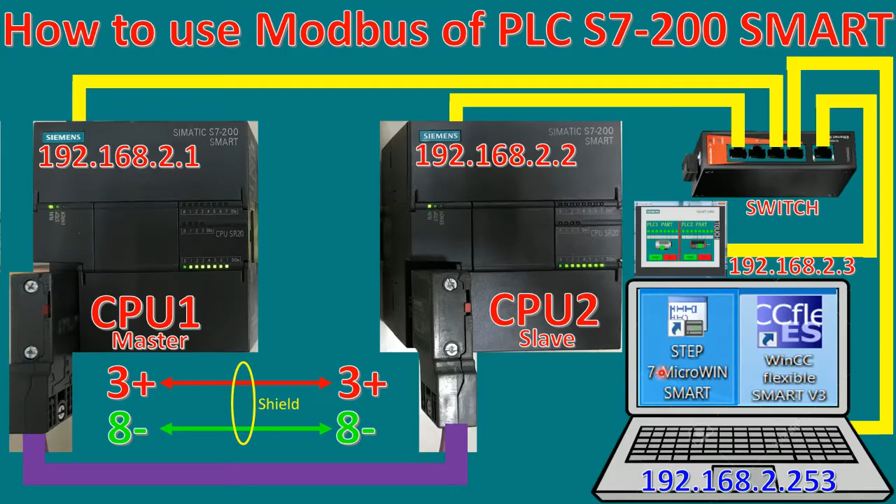Today I would like to show and share how to use the PLC S7-200 Smart CPU SR20 to send data to another PLC S7-200 Smart CPU SR20 by using Modbus RTU for communication.

Okay, so before going to create the program blocks or use the library, I would like to explain the concept a little bit. Here is the PLC S7-200 Smart that we will set with the IP address 192.168.2.1. This IP is just an example.

So if we use STEP 7-Micro/WIN SMART to connect to the PLC, we can change the IP address to match the computer IP address. So if we choose the computer IP address range like this, we can manually set the IP address of the PLC following your computer.

Okay, and here is the Modbus cable. Actually this is a Profibus cable, so we can connect from port 0 of PLC 1, for example CPU 1, to CPU 2, where pin number 3 connects with pin number 3 and pin number 8 connects with pin number 8. Pin number 3 is plus data, pin number 8 is minus.

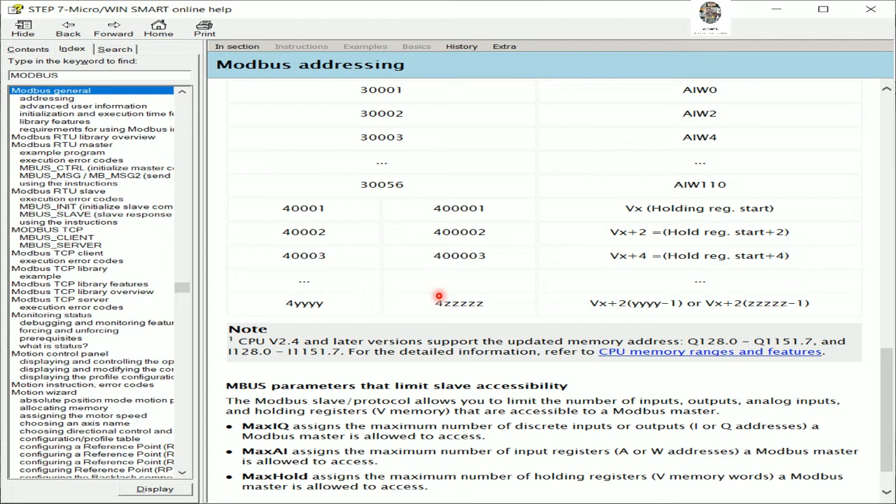For part 1, I will send data from CPU 1 to CPU 2 via IB0 to QB0. After that, I will send data from CPU 2 to CPU 1 with IB0 to QB0. So in total, 8 bits are sent from CPU 1 to CPU 2 and 8 bits from CPU 2 to CPU 1. Okay, and here are the parameters that we will learn together.

So first we can go to the Modbus library. If we install the STEP 7-Micro/WIN SMART software, we will get this Modbus library. Okay, so I would like to explain the blocks. The first one is the enable block. We can use always on SM0.0, and this is the mode. It means that if we turn it on, we enable Modbus mode. Let's see here. On means enable Modbus mode. Off means use the PPI protocol. Okay.

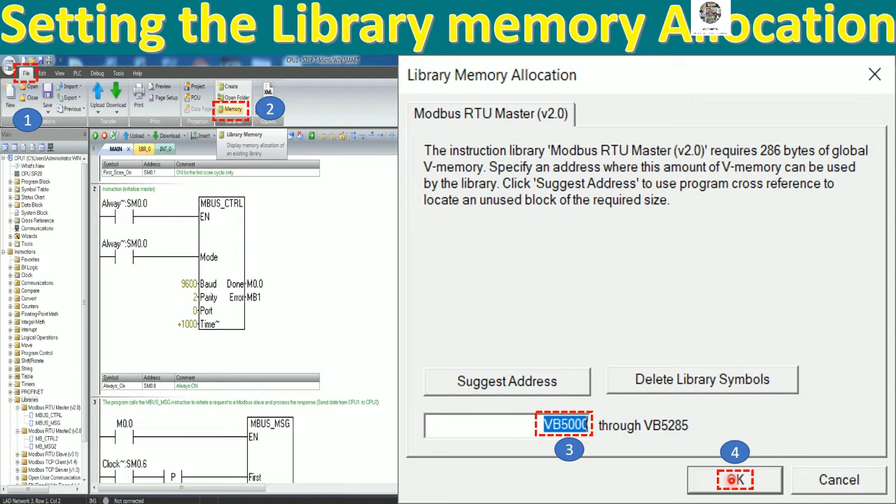And this is the step to assign the memory. First, let's go to File. Second, click Memory. Third, fill here with VB5000 and then click OK. After that, we will download the program to CPU1. Finished for the CPU master.

The next step, we will go to the CPU slave, CPU2. First we drag and drop the Modbus library block here, and we fill the address. Follow this one, and we insert the Modbus slave. Then we assign the memory allocation also with VB5000, and then download the program to PLC2. So this is step 1, we will follow this slide. So let's go.

First let's open STEP 7 MicroWIN SMART. Right now I use version 2.5, already installed on my PC. If we install it on our PC, we get the libraries, many libraries for Modbus: Modbus RTU master, RTU slave, TCP/IP, TCP server. We can use many functions for this library. Version 2.5 has many libraries we can use. So let's go to our concept.

Let's go to the slide, I already converted it to PDF. The first one I already explained: we will send IB0 to QB0 of PLC2, right? So let's go to this step. First, we need to insert the Modbus control. Go to the library tab, then Modbus master, and drag and drop the block to the main program. Okay, like this.

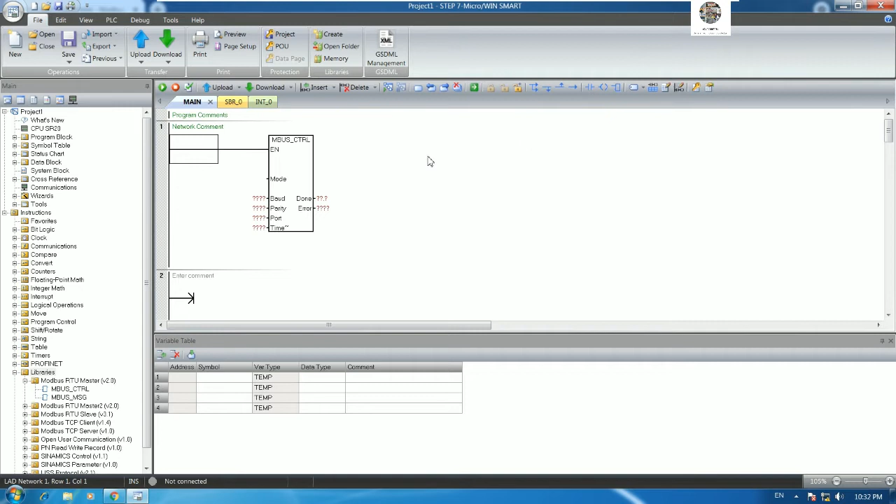The first one here should be enabled. I will zoom. We can enable with SM0.0, which means always on. For mode we use always on also, because we need to enable the RTU mode. So SM0.0 to enable the mode. Then the baud rate: we use 9600, and parity we use 2, which means even. So I will put 2.

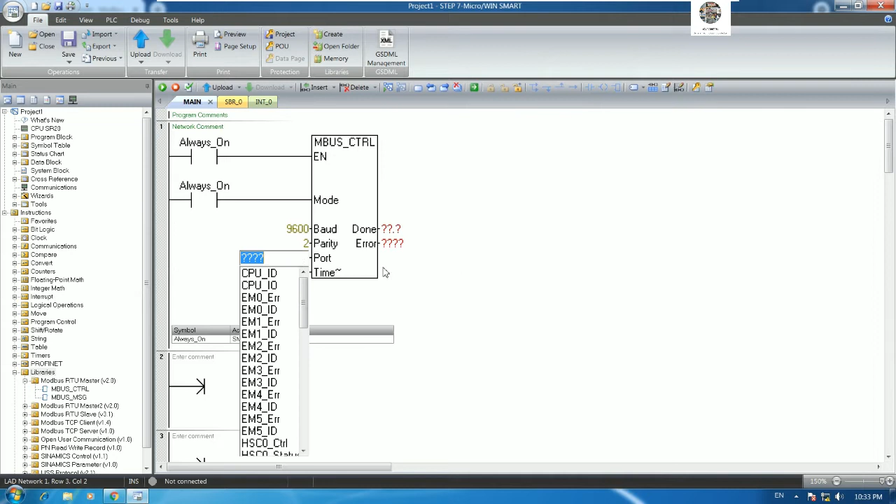And for the port, we can follow here. Port I will use 0, which means the RS485 integrated in the CPU. And the timeout, I will use 1000, which means 1 second, 1000 milliseconds. For done and error, we can use other memory, for example M0.0 and MB1, like this.

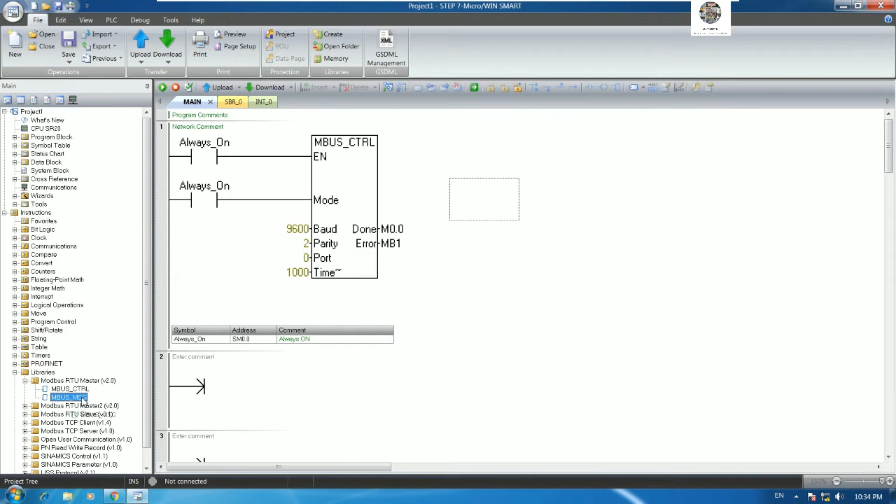And we need to insert the Modbus message. So let's go to Modbus message. The first one here, we enable also. If the control block is done, we can enable the Modbus message block. So I will use an NO contact and copy from the done. If this block is done, it means initialization is finished, and then we go to block number 2 for Modbus message.

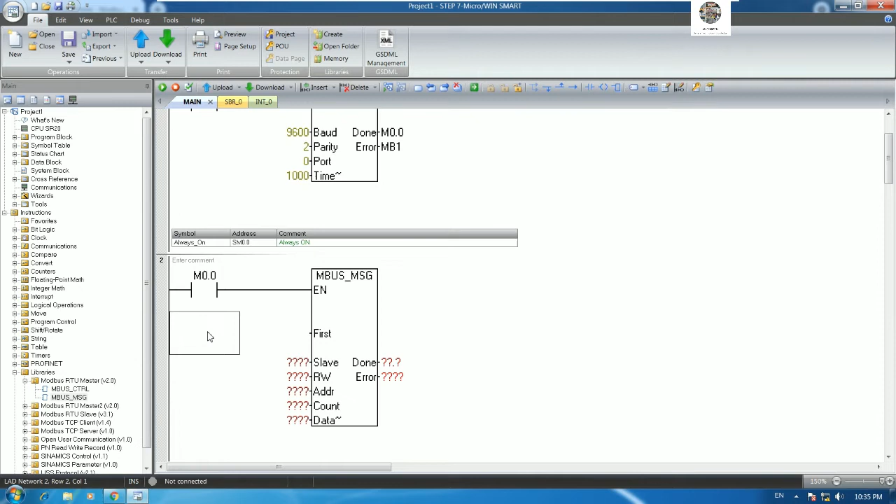And first, for initial, we can use the clock memory. For example, SM0.6, the clock pulse. We can press F1 and then look at SM memory, special memory, right?

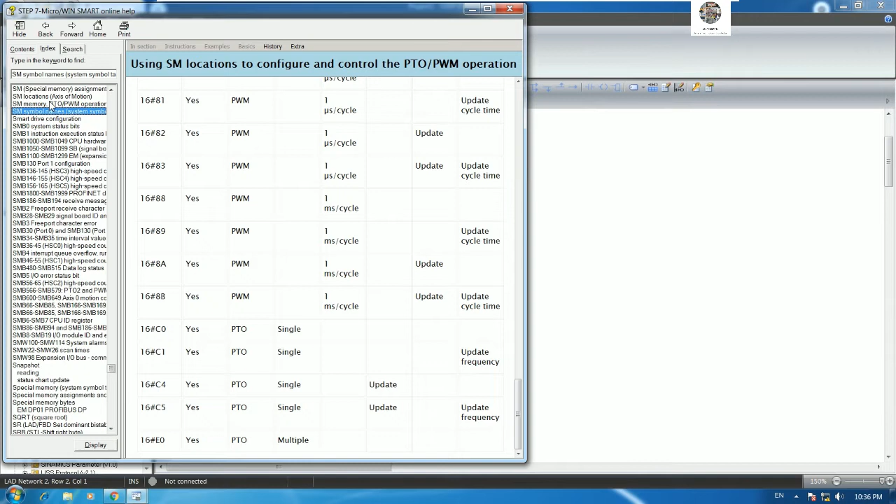So for SM memory, we can read many SM memory that we can use. Let me find SM0.6, right? SM0.6 means clock scan. So we can use clock scan to scan the block, yes.

So I will use SM0.6 and then P because we need only first, right? So for this one we can use positive edge, yes.

And for the slave, it means slave address. So example 8, and here is the read write. If we put 0, it means that we cannot write. So right now we put 1 because we write the memory to the CPU slave, right? And here is the address. I can use 1.

For count, it means assign the number of data elements, right? So we can count each bit. Example, if we would like to send two bytes, 16 bits, right? So we can enter with 16 bit. So right now I will use only 8, right? So I put 8, 1 byte, right?

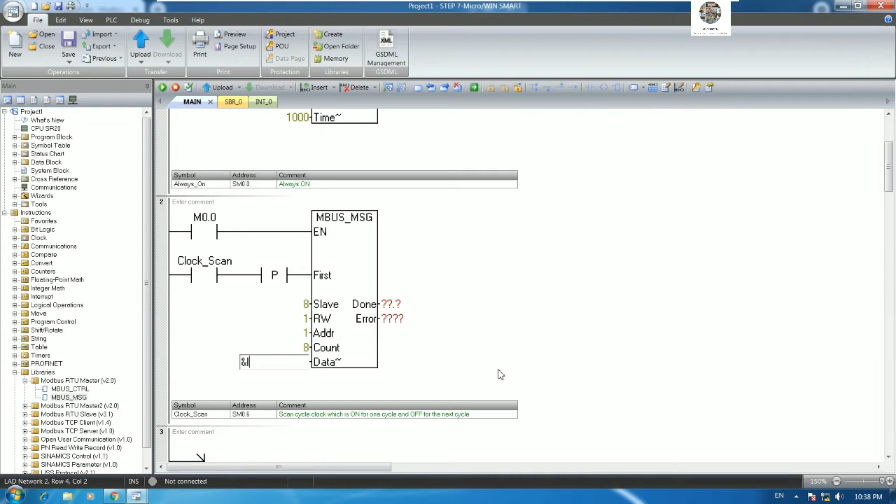And here is the data. So data will start from IB0, yes. And for that I will use M0.1, MB2, yes. Sorry, MB2, yes.

So this is the data that we will send to the slave, right? So we will insert one more for send, or get the data from CPU slave, right? So we will insert one more block for Modbus message.

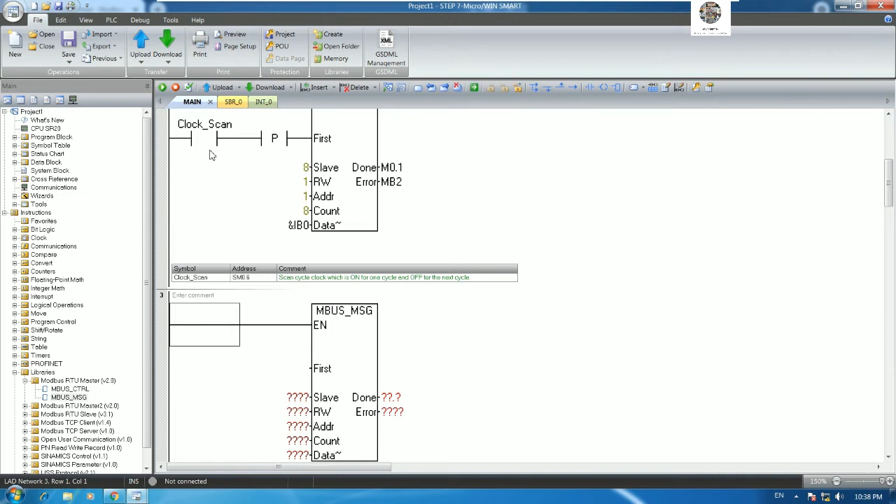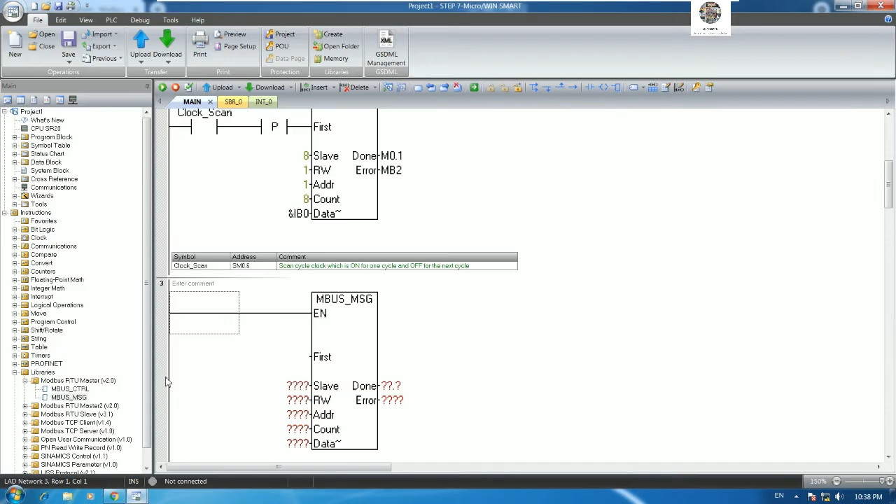Here we can enable, yes, we can enable, follow my slide. So this one I will use as M0.0 also, yes. So M0.0 means that block number 1 is finished here. And then block number 2 will turn on, right? So I will use N, it means negative edge.

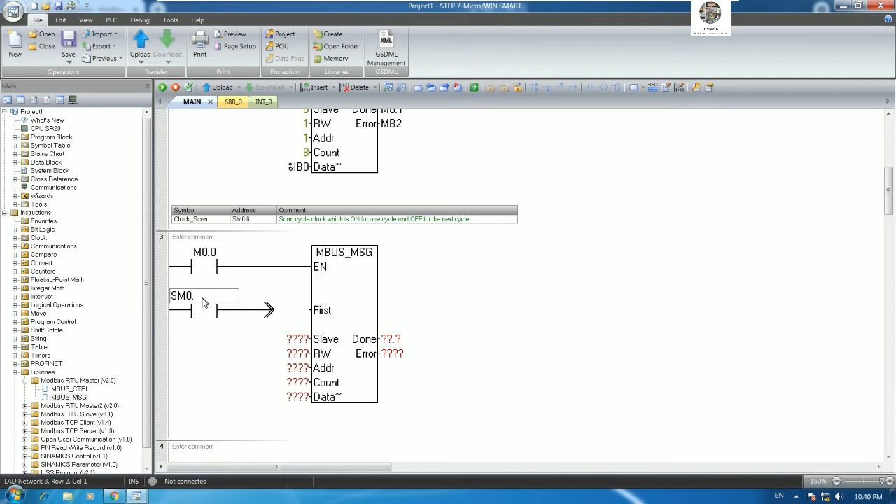Okay, so I will use this one, yes. SM0.6 also, right? It means the clock memory scan, yes. So I will use NO and then SM0.6, and I will use negative edge. And here is the slave 8 also, right? And read write, it means that we got the data from the CPU slave. So we don't need to read, don't need to write, right? We need only read, so I will put 0.

And here is the address. Let's see here, the address is 10,000, right? 10,001, yes. So I will put address 10,001, and count, we will get 8 bits also, yes.

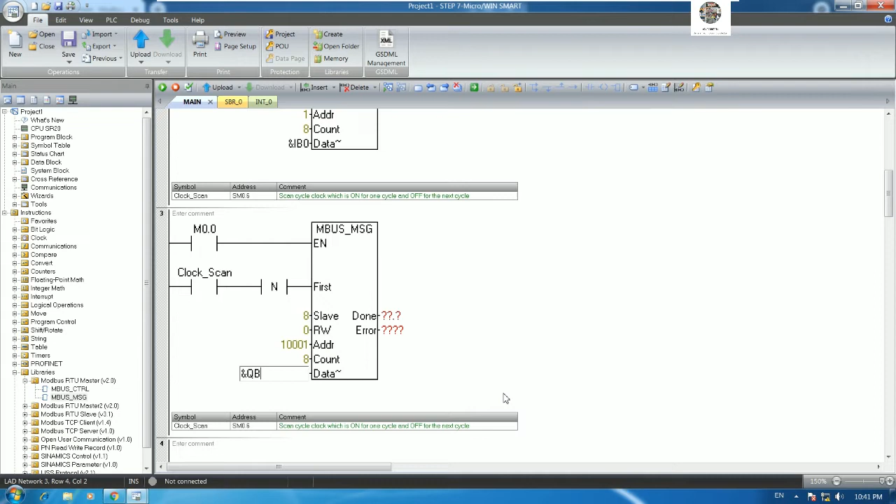And the data should be QB0, right? And this one we can put M0.2, MB3, yes. So that's all for creating the block.

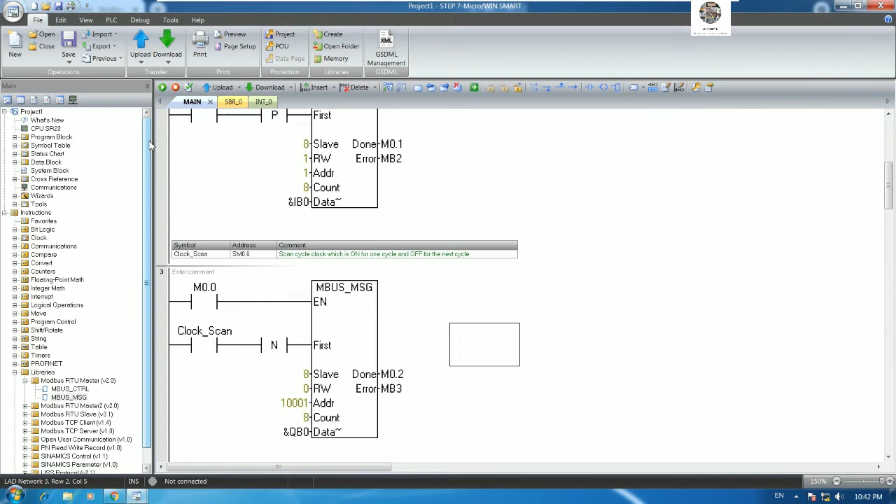But when we compile the block, we will get an error, right? Let me test. So I will compile, and we will get error 135, right? Error 135, because we have not yet put the memory allocation to this block, yes.

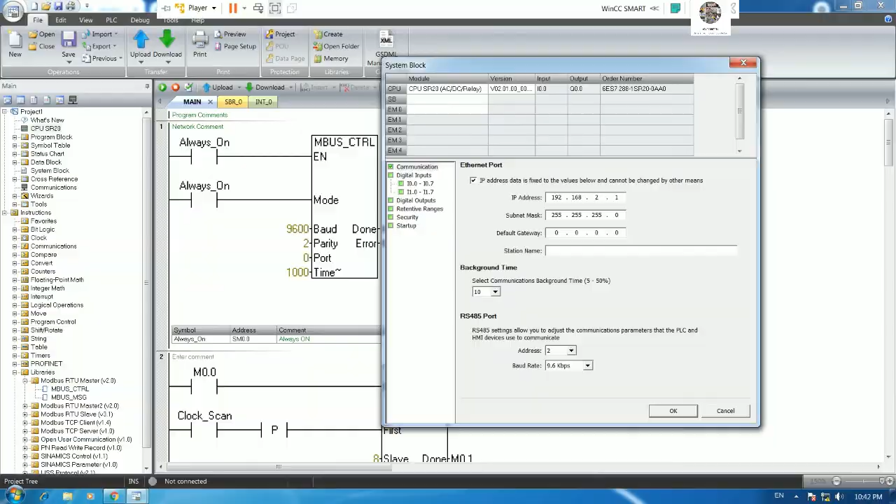So first let me go to setting the CPU, yes. Example the CPU SR20, I will go to communication and then set the IP address, right? And for CPU one, we can follow with this step. Yes, 192.168.2.1, right? .2.1 first, and then go to Startup.

I will start run the CPU, and then I will assign the memory allocate to the block, right? Otherwise we will get error, many error. So let's go to file and then go to memory. Here click, and then I will put VB 5000. Example VB 5000, and then click OK, and then let's compile again.

We will get error 0. Okay, so good. And then we will save the CPU 1 or CPU master, yes.

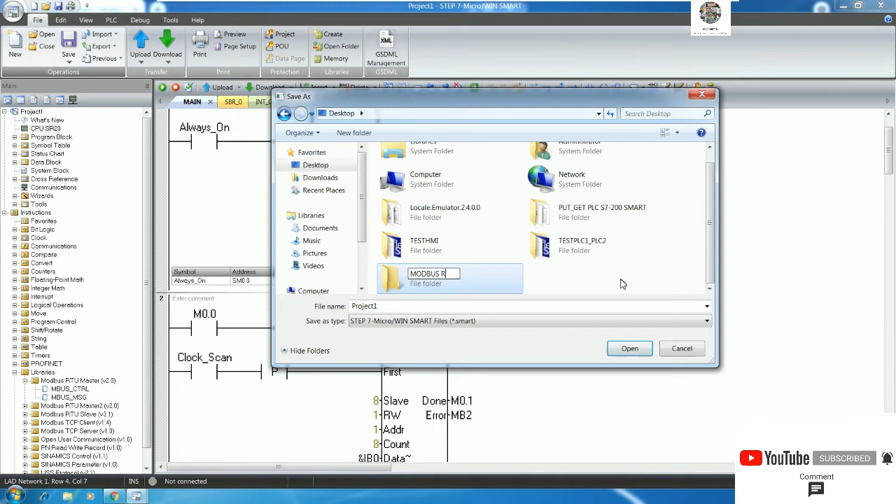So this one, Modbus RTU, S7-200 Smart project, and this one for CPU 1 or master, right? So master, okay.

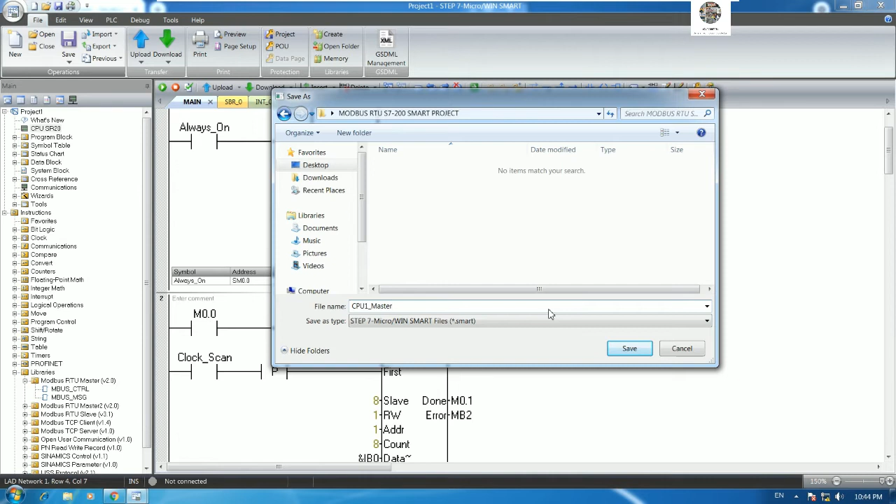For RTU master block we already created, right? And then we can comment a little bit here. Example, initialization session of Modbus.

Okay, and this one send IB0, in binary that 1 byte, right? One byte I0.0 to I0.7, right? To PLC 2, or slave, right?

Okay, and this one should be got Q0.0 to Q0.7, right? Q0.0 to Q0.7 from PLC 2.

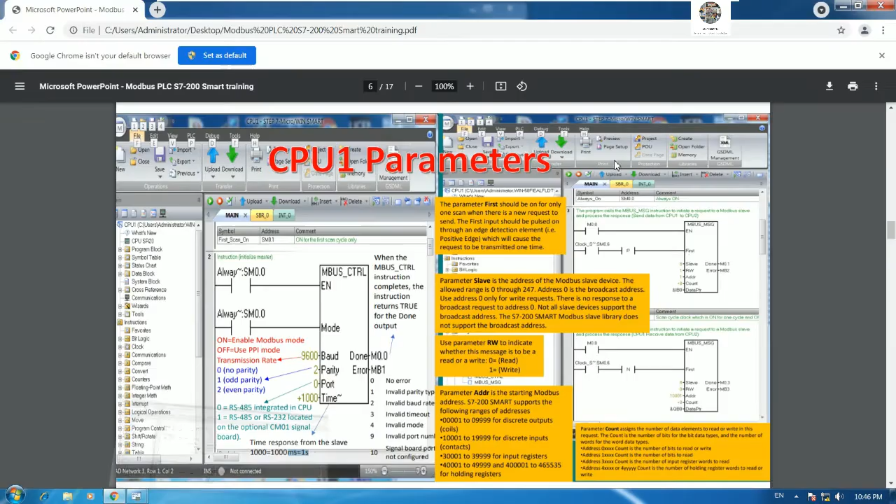And then open one more, Step 7 MicroWin SMART. We will create the same procedure that I already showed in the slide, for CPU 2. So we will use the MBUS_INIT for slave. This one I will minimize and then go to slave.

So for initialization of Modbus block, and then we will go to library and then go to Modbus RTU slave, right? Click here, and then we will use this block, drag and drop.

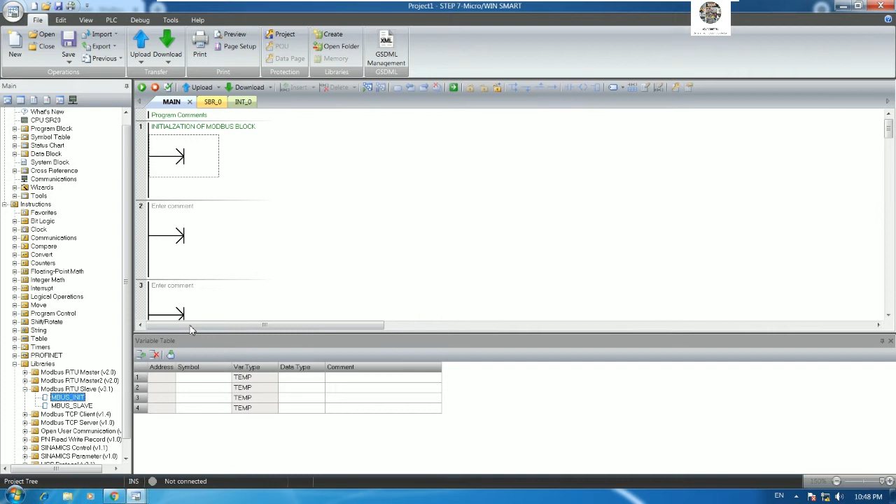So first is enable, right? But enable we will use only one scan for enable, so SM0.1. SM0.1 means that first scan when we turn on the power of PLC or we start the CPU, it will first scan on, yes, and then off, on only one scan, right?

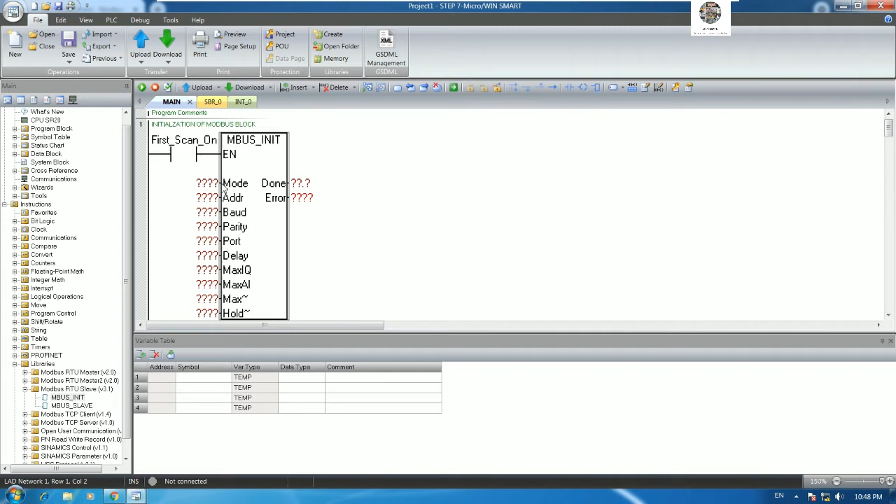And for the mode, we can use another mode, example mode 1, yes, we will use mode 1, address 8, right, and the baud rate the same, parity 2 also, port 0, delay 0, 8 mark 0 max AI 0 and VB 0, right?

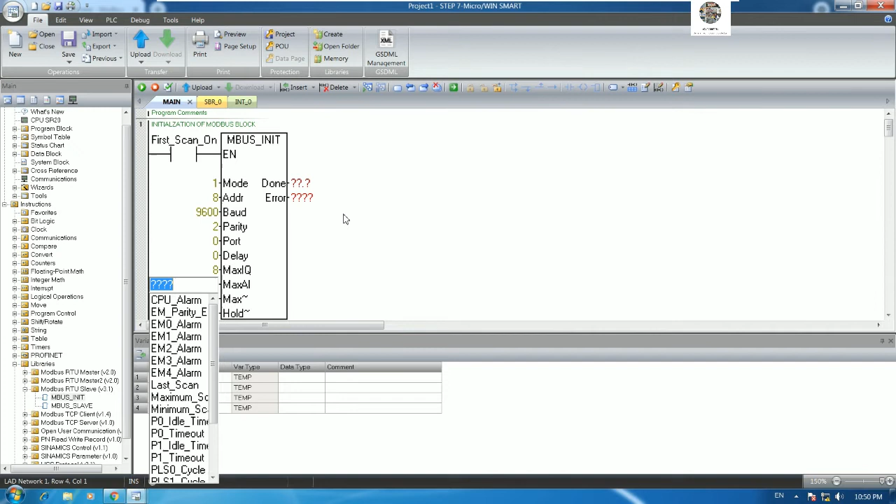Okay, so we can follow my slide. Mode 1, address 8, baud rate 9600, parity 2, port 0, delay 0, max IQ 8, max AI 0, and this one 0, right?

And the holding register will start from VB 0, and for done we can use M0.0, MB1, yes,

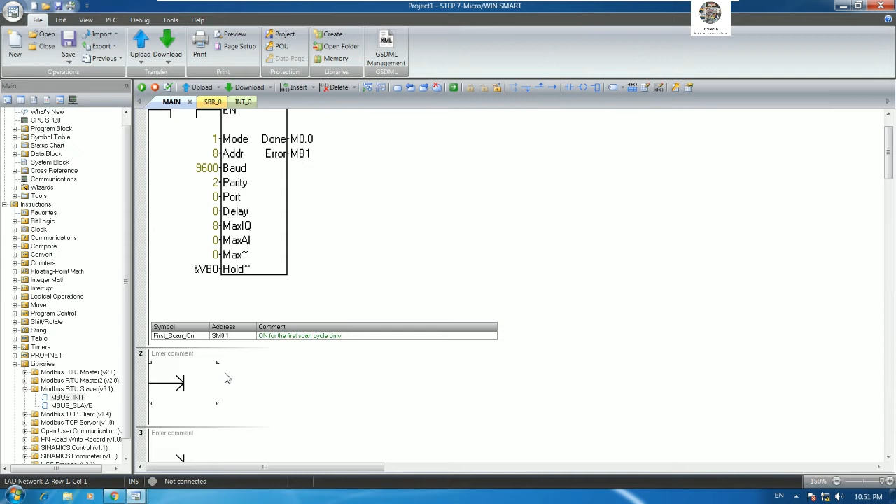and then we will use one more for Modbus slave, right? So Modbus slave, example M0.1, MB2, yes, and don't forget put the SM here, should be this one, right? SM0.0, it means that enable, right? So we can enable with SM0.0,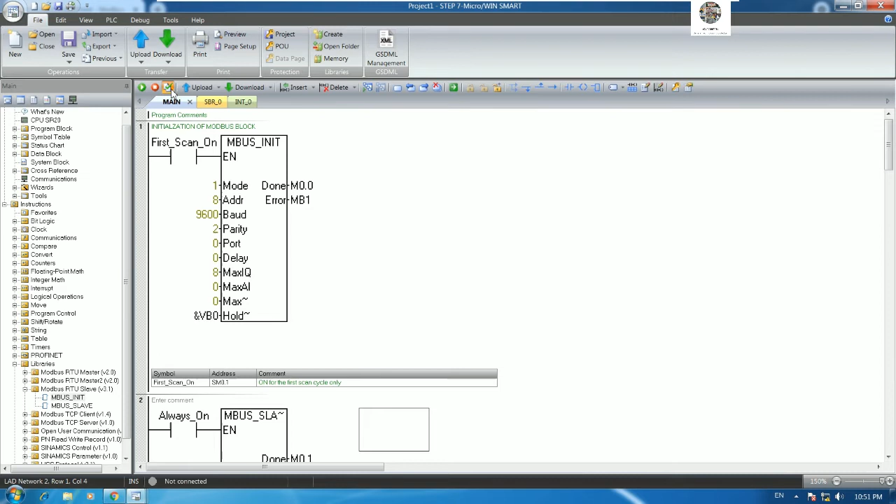And then if we compile like this, we will got error also, error 74, yes, because we not yet put the memory allocation, right?

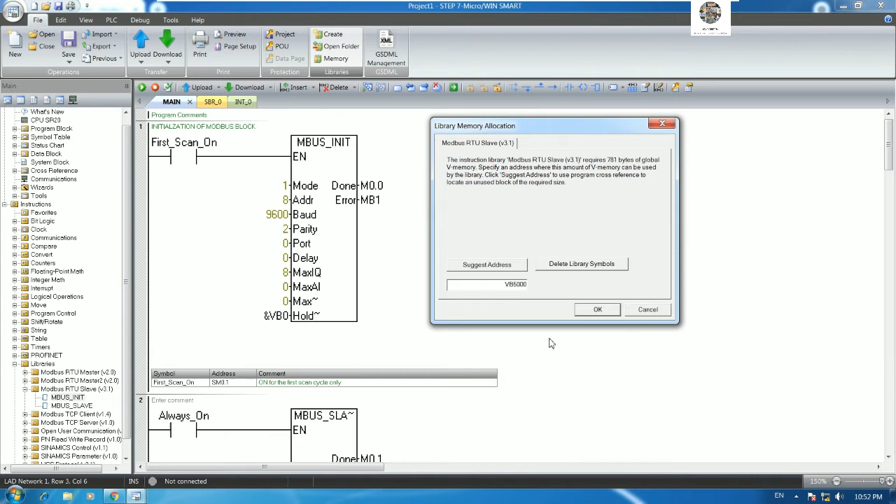So let's go to file and then go to memory, and we can put VB 5000, yes, and then we can compile again. We will got error 0, right? Okay,

Then we can save, and this one should be CPU 2 and slave, right?

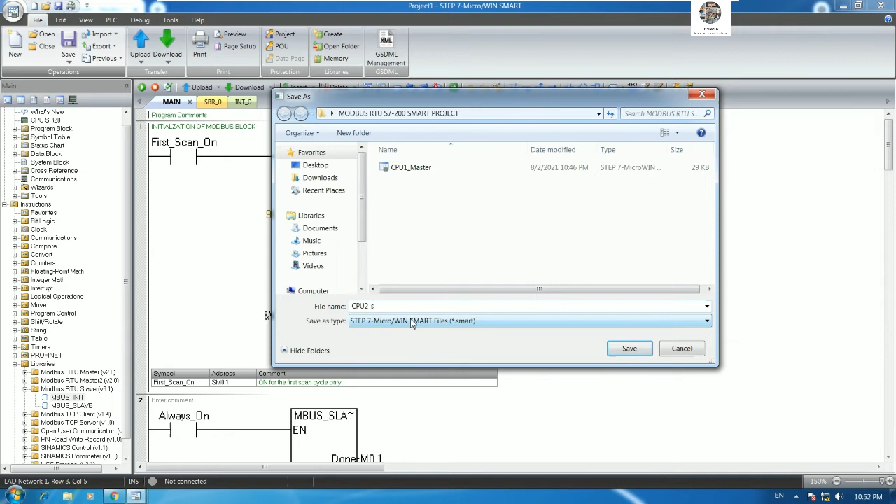Okay, and go to the CPU property communication, set the IP address with 192.168.2.2, right? Okay, and then we will go like this.

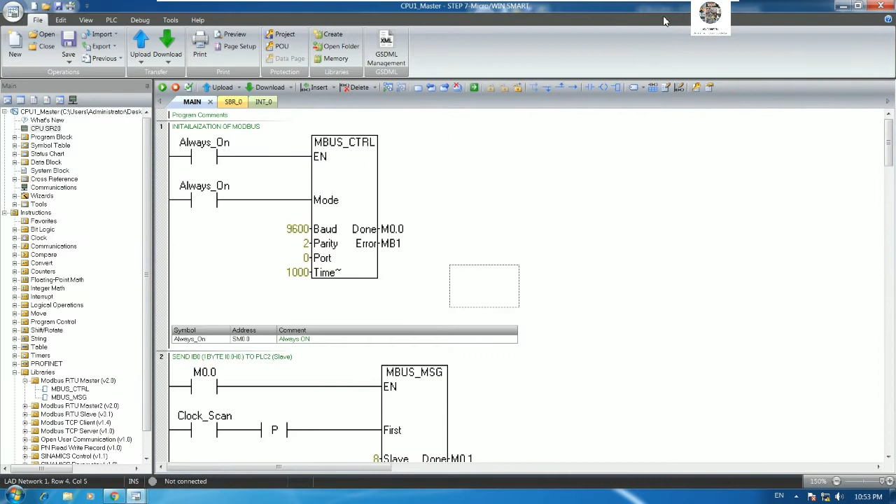Okay, I will open like this, then zoom out a little bit. Okay, one more. We can do like this. Okay, I will zoom out a little bit.

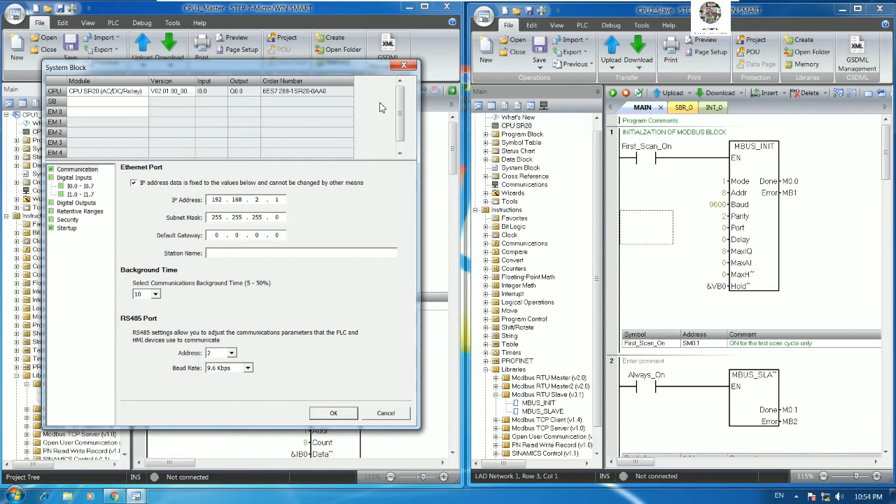So this is CPU 1, it means that master. Here is the CPU 2, it means that slave. So we will download one by one to the CPU, right? So before download, we can go to set the IP address of our computer to be the same range as the CPU. For CPU 1 is 192.168.2.1, CPU 2 is 192.168.2.2. So I will set my computer IP address with

192.168.2.253, yes, and subnet mask 255.255.255.0, yes. Okay,

And then we can ping for test. Go to command prompt, cmd, we can run as administrator. Then we can use cmd ping 192.168.2.1, yes, we can ping for CPU number 1 and one more.

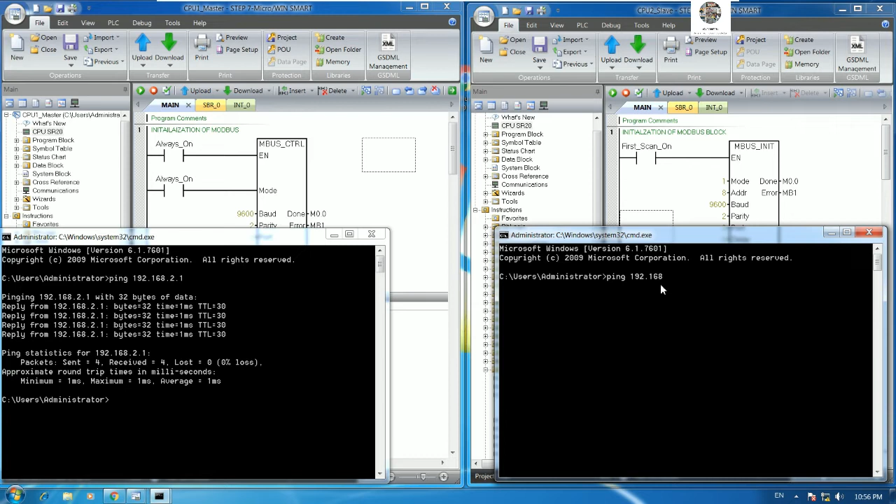So ping 192.168.2.2, yes, we can ping also. So we can connect, right?

So we will download the master program to CPU number 1 and slave program of Modbus to CPU number 2. Okay, so I will go to communication and then choose the network that I already connected to the switch. Yes.

Okay, then we will detect two CPUs of PLC, right? The first one is CPU number 1. I will choose this IP. Actually, we can click flash lights and then we can see the CPU is blinking. Yes.

Okay, we can stop and then we can choose for download. Then download button and then I will download the program to master CPU. Okay, and then we can go online and start the CPU. Yes.

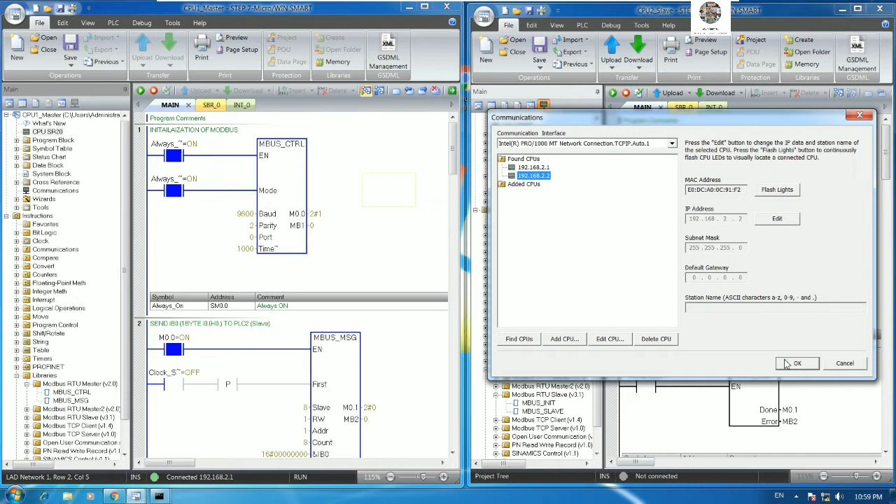And then I will choose the CPU number 2, right? 192.168.2.2. We can click here to flash the LED. Yes. And then we can click OK. And then download to the CPU.

Finish. And then we will start the CPU 2. Yes.

So if we start the CPU 2, let's see the condition. Here is 1, rest. It means that done. So if I stop the CPU, let me stop the CPU.

Okay, stop the CPU. Start the CPU again. Yes.

So we can test the data. Yes. So first we can go to the status chart, right? I will choose the data. So this one should be IB0, right?

And this one should be QB0, got data from the CPU slave, right? So I will use binary. And then here for CPU slave, I will use status chart also. And here should be QB0, right? And this one should be IB0.

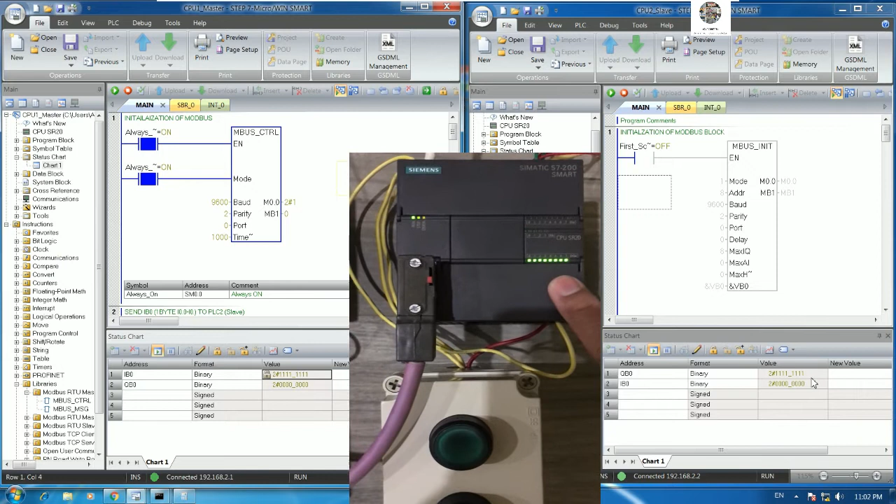When I force the signal, let's see QB0 is turned on all and the output is turned on also. Let me show. Okay, let's see the output of PLC slave is turned on. Yes, 8 bit, and this is the CPU master, connected with the cable. So it works properly from CPU master to CPU slave.

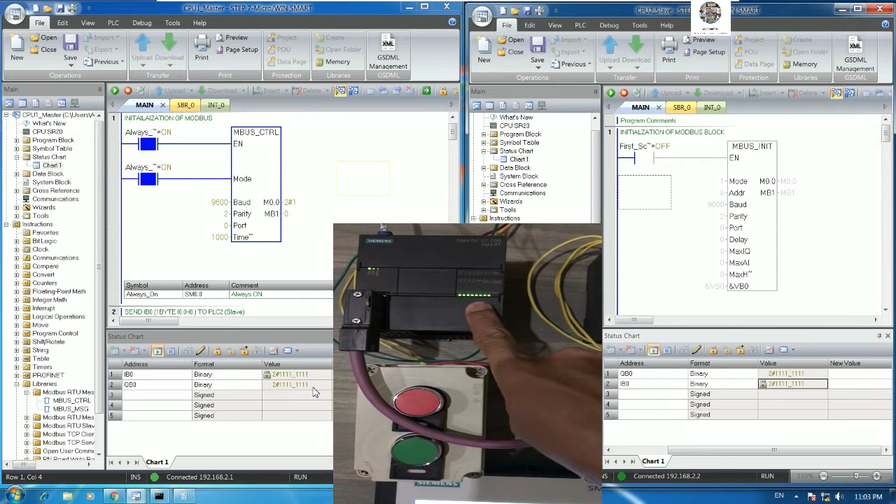And if we would like to force the signal from CPU slave to CPU master, we can write like 255 also and then force the signal. Yes, it will turn on 8 bit also. Let me show. Let's see the CPU master is turned on 8 bit also for output. Yes, so it work.

So the communication between CPU master and CPU slave is working perfectly. So I will write 0, it means that it will turn off, and then here unforce. And this one I will force to 0 also, and then unforce.

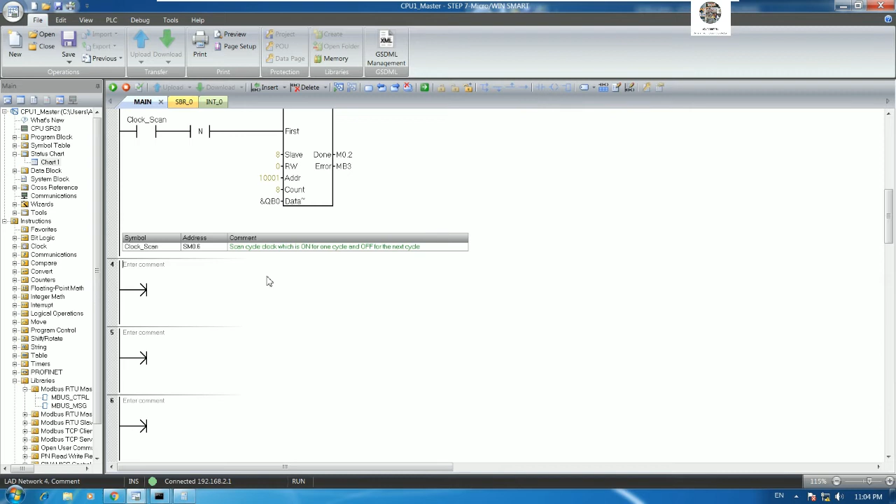So we can also create the HMI for start sending the data from here to here also. So let's create. Okay, this is just example, so we can create send data from PLC 1 master to PLC 2 slave.

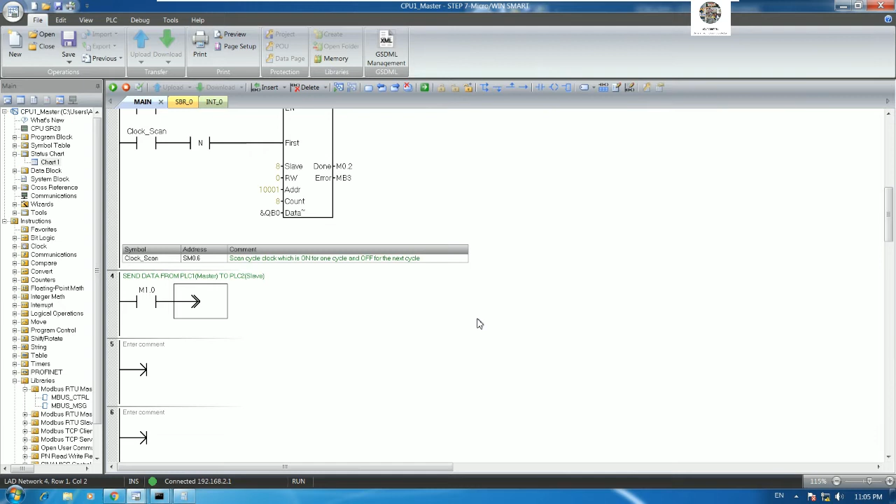So if we would like to control via HMI, we can follow like this. Example, I will use M0.0, we already use, right? So example, I will use M1.0. And then let's turn on the output. And we also use the push button for test also, right? Okay, let's test together.

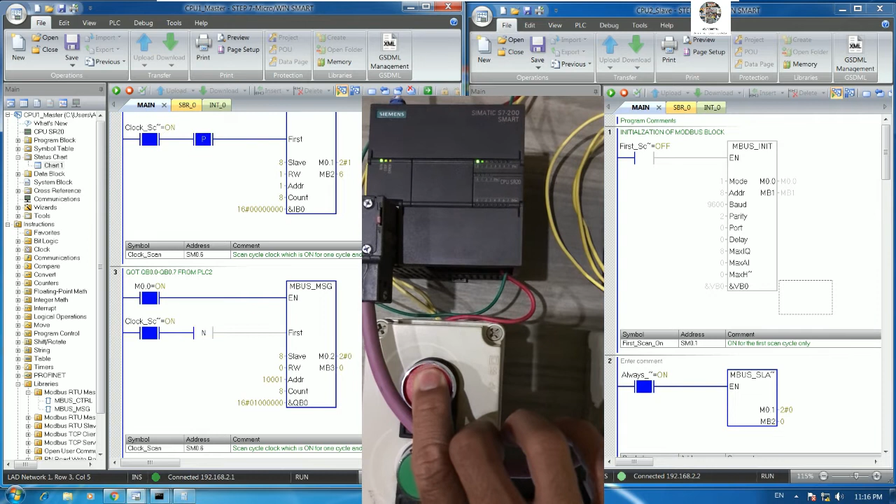So here I already put and connected the cable to the push button. So if I enable the PLC, example the bit number 0, yes, let's see the PLC slave is turned on also if I enable the input of PLC master. And for bit number 2, I will push the button. Yes, on, and then see here is on also. And this one on, and here is turn on.

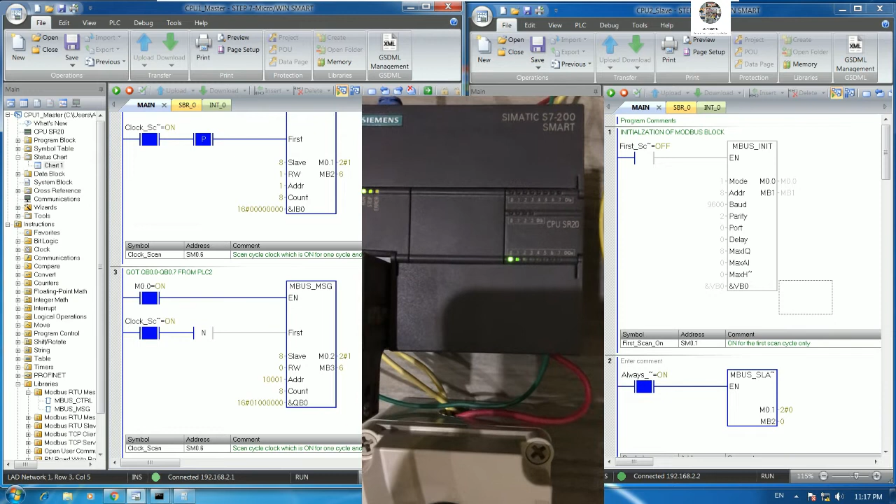I will hold the signal from the input, and let's see the output. Here is turn on. I will release, and then let's see it is released. I will turn on one more input, and let's see the output of master is turned on also. Yes, so it worked perfectly.

And if everyone would like to show the status of the output on the HMI, we can also create the HMI. So let's open the WinCC Flexible Smart version 3, and then create the new project here. Right now I will use Smart 700 IE V3 here to be the same with my hardware.

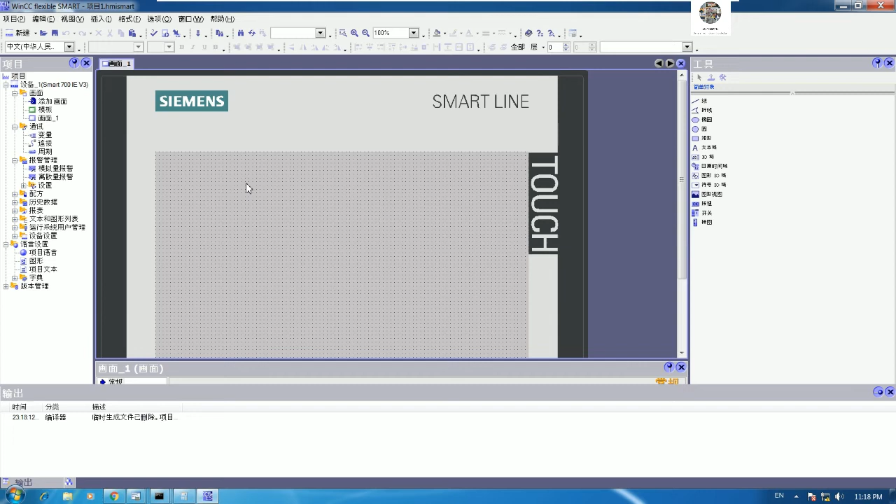And then we will create the communication by link to the PLC 1 and PLC 2, right? So example, I will create the connection for master CPU, and I will connect to the SIMATIC S7-200 Smart, and I will use the IP address of Ethernet, because we link via LAN cable. So 192.168.2.253, it is the IP address of my PC.

And for this one, 192.168.2.1, PLC 1. And for PLC 2, we can also use slave, this one should be slave, and connect with the PLC Smart also. And this one is the same, but this one should be changed to 2.

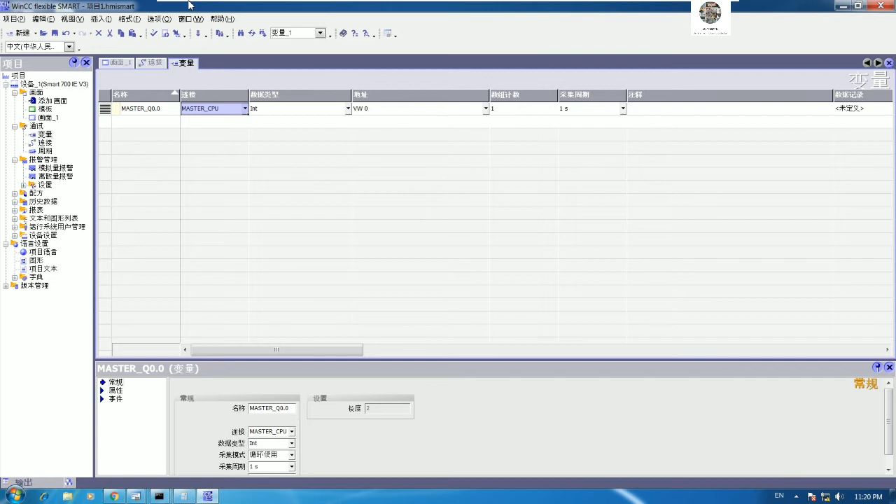So we need to show the status of output of PLC 1, right? So we will create the tags. So for CPU 1, this one should be Q0, PLC 1, or we can write master Q0.0. Yes, it is Boolean, right? So I will choose Boolean, and then it will start from Q0.0. This one should be bit 1, right? Master CPU bit 1. This one should be 0.1, right? Q0.1. Master CPU bit 2.

And we can choose like this. Okay, so one more, right? 0.7, because totally 8 bits. So from Q0.0 to Q0.7, right? And this one we can try with the master bit 3, master bit 4, master bit 5, master bit 6, master bit 7, and master bit 8, right?

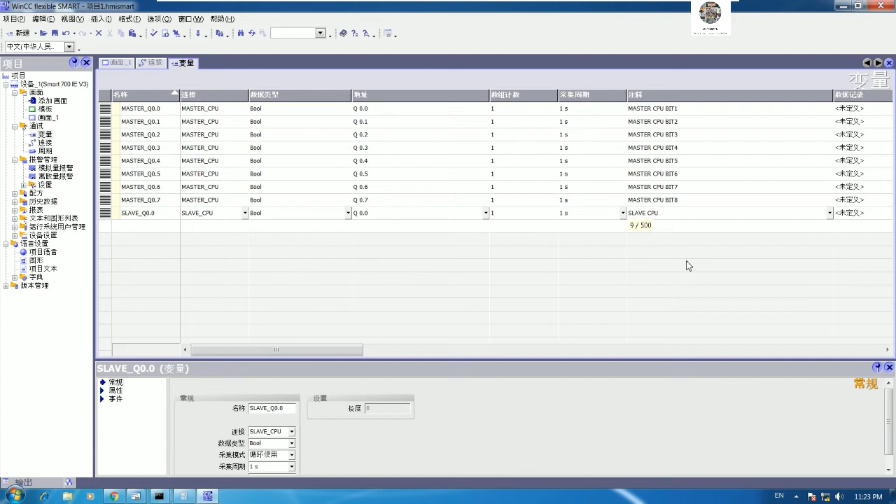Okay, and we will show the status of CPU slave also, right? So we can start from slave Q0.0, and this one I will choose the connection for slave CPU, right? It's very important here. If we choose the wrong connection, we cannot control another PLC, or we cannot see the status from the PLC. So I will choose slave, and then it will start from Q0.0, and this one should be slave CPU bit 1, right? Then I can drag and drop like this. Okay, delete one.

Okay, then I will go from Q0.0 to Q0.7 of PLC slave, right? Okay, so this one should be copied and then pasted here. Q2, paste here also 3, 4, 5, bit 6, bit 7, and bit 8, right?

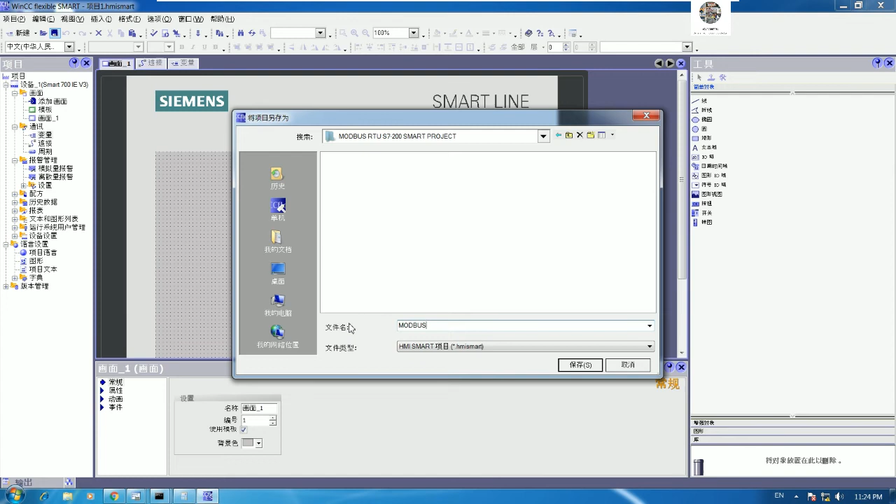Okay, and then we can save the project. Okay, I will save to Modbus, right? Okay, so Modbus HMI, yes, and then I will go to separate the screen, the same as the previous video. So I will separate the screen like this. The right side is for PLC 2 and the left side is for PLC 1, right?

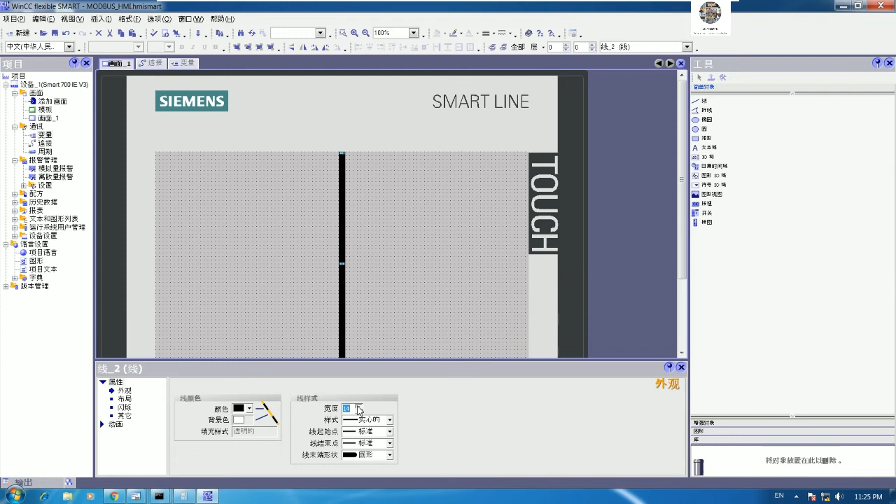Okay, so I can go to property and then change this one to be bigger than before, right? And for the background I will change to this color, and this one I will use green color to separate, and then I will use the text. Okay, the text I will use PLC 1 or PLC master, PLC master output status,

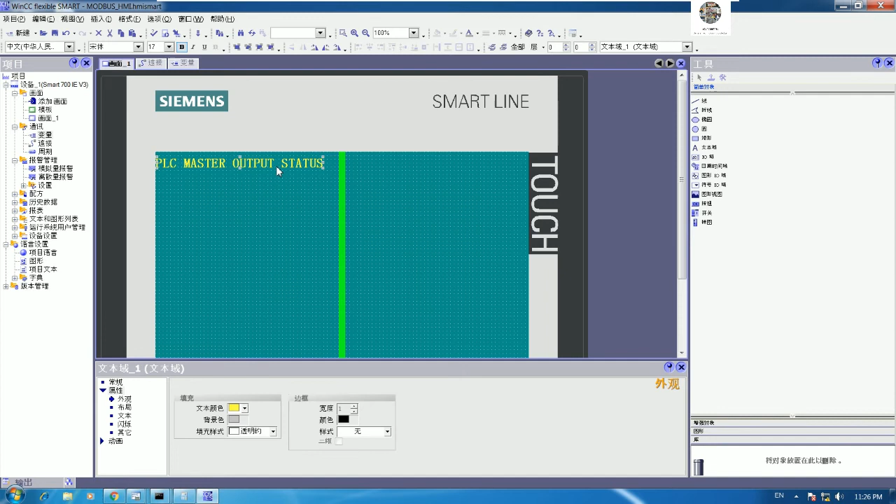yes, and for the text I will use yellow color, and then I will use bold, and then I will increase the size to be maybe 17, yes, like this. And this one should be the status of PLC slave, right? So I will rename this one to be slave, okay,

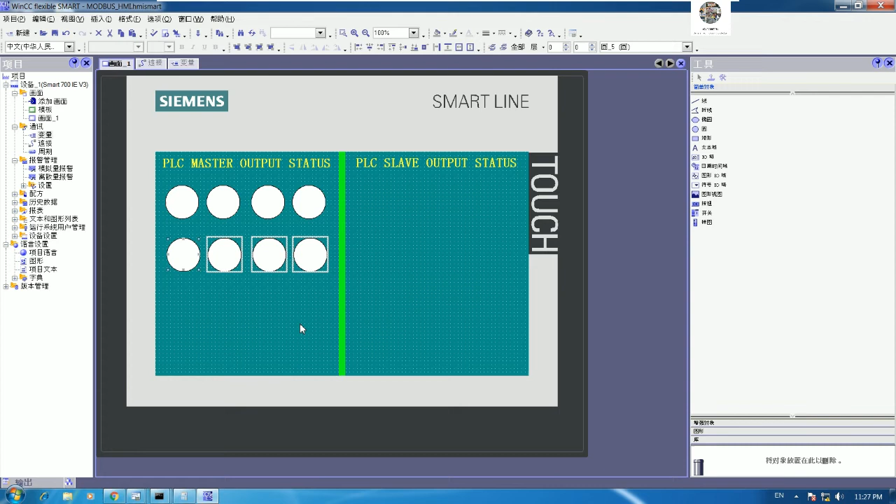and then we will show the status of the 8 bits of PLC master, right? So let's go to create like this. So bit 1, bit 2, bit 3, bit 4, and then we can make it like this. Okay, and then I will copy 4 more, and then I can change color to be red when status off, and green when status on, right? So I can copy for slave also. Okay, like this.

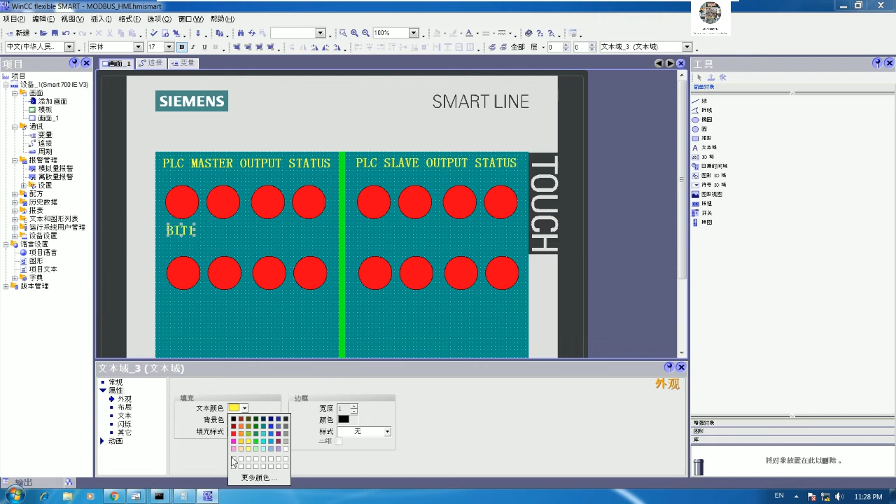Okay, like this. And for this one we can write, for example, bit 1 until bit 8, right? So bit 1, bit 2, bit 3, bit 4, bit 5, bit 6, bit 7, bit 8, right?

So I will rename this one to be bit 2, bit 3, bit 4, bit 5, bit 6, bit 7, and the last one bit 8 for CPU master. So I will copy to be the same for the CPU slave, right? Okay, good. Like this. I can save again. And then we need to show the status, right? So here, for example, showing green means that it's turned on.

Yes. So let's go to property and then go to animation and choose master status Q0.0 until Q0.7, right? So I will choose master Q0.0 and then change the color. When status 1, it means that it's turned on. I will change to green. This one also master Q0.1. I will use bit, and when 1, I will change to green. This one master Q0.2, 1, and then change to green. Master Q0.3, 1, and then change to green.

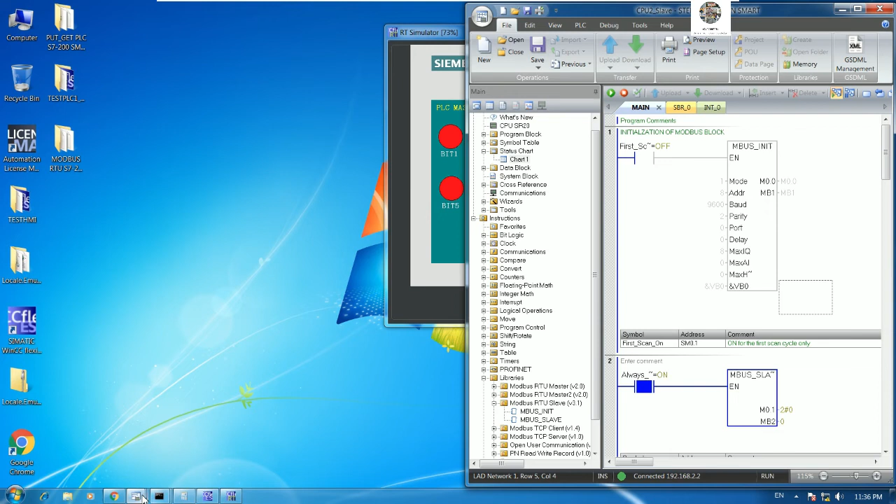so that's all, and then we can save, and then we can simulate before downloading to the real HMI. Okay, and then we can go online with this PLC, and then go here. So no bit on, right? So for the signal, for example, I force 8 bits, so 255, force. Let's see, 8 bits are turned on, right?

So why is this one not turned on, not green? Let me check again for Q0.3. Okay, this one, right? Go to property again. Oh, this one should be changed to green, right? Okay, and then we can save and then simulate again.

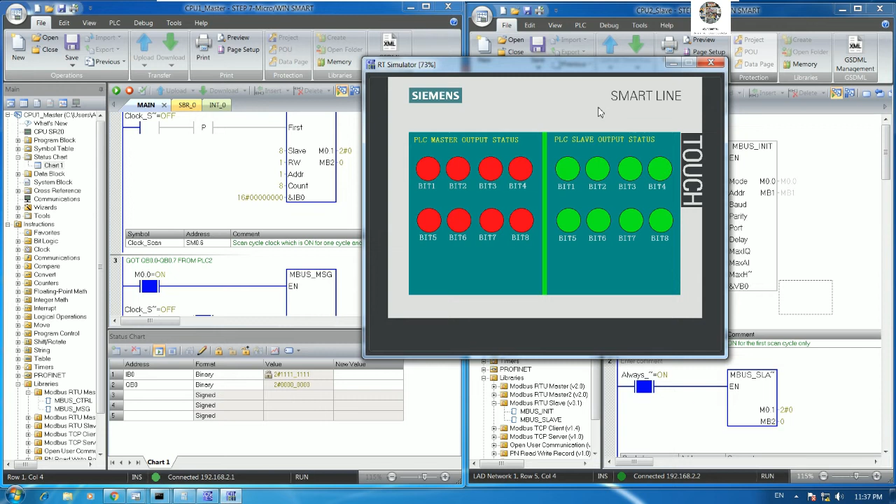Okay, so it's green, so the simulation is green, and then we can force 0. Okay, and then we can unforce all, and for the PLC slave we can also test.

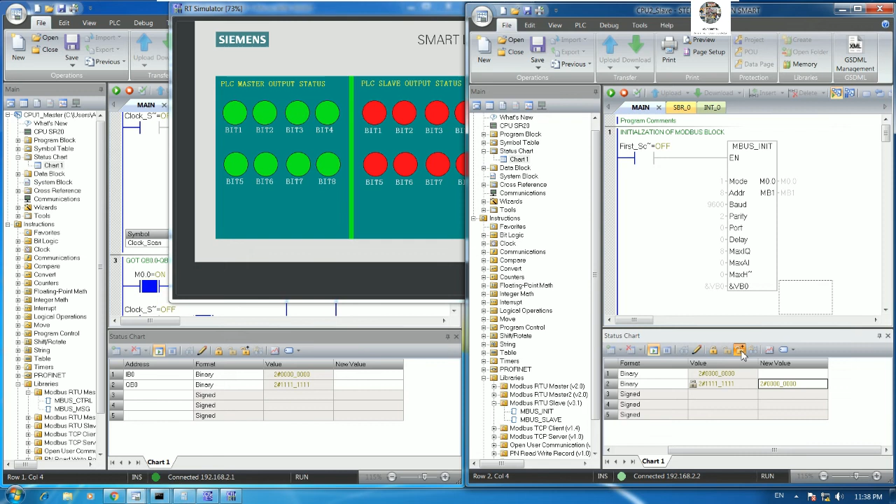So I will choose 255, 8 bits, right? Force, sorry, it should be force here, right? Cancel all force, and then I will force here 255. Let's see, the status of the PLC master is turned on also. Okay, so I will remove force. Yes.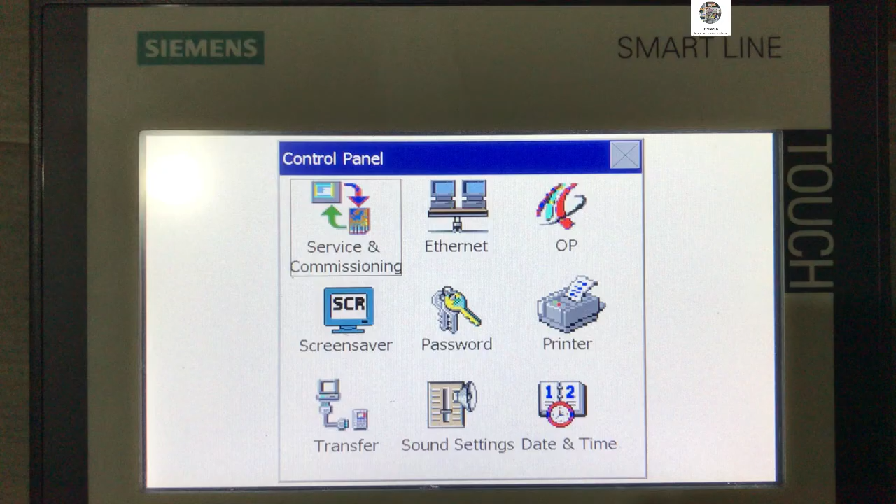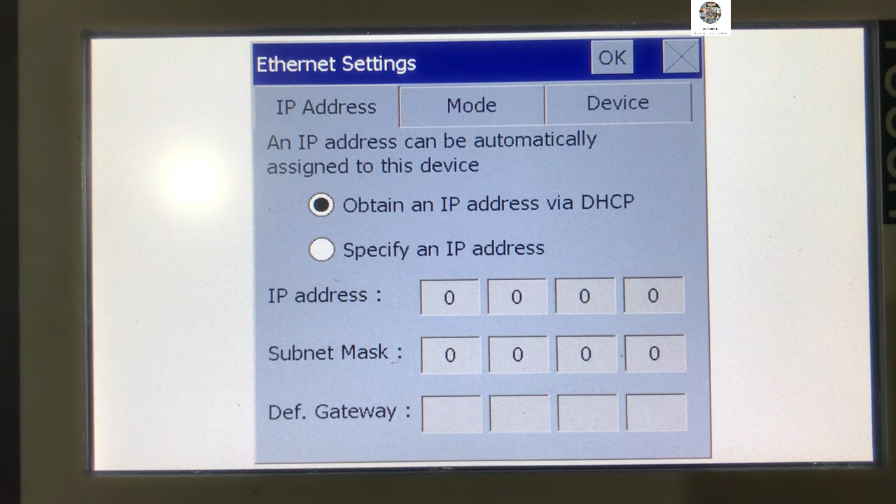So first, let's go to the transfer tab, and then we need to enable all these options, right? And then press OK, and go to the Ethernet. Yes, and we need to set the IP address of the Ethernet, because we use the LAN cable for communication between our PC to download the project to this HMI, right? So let's go to specify IP address.

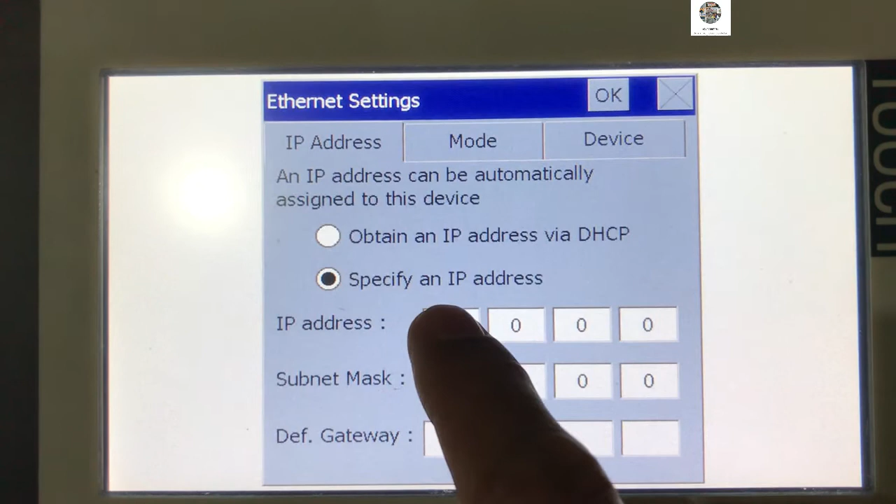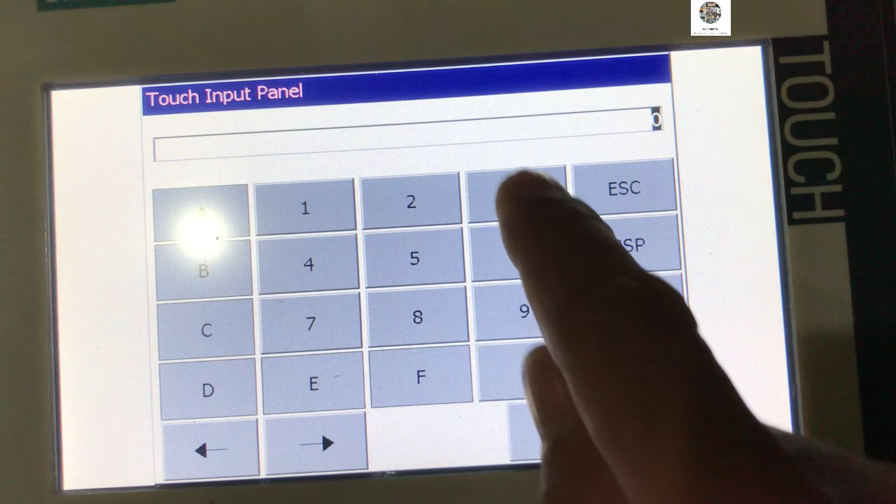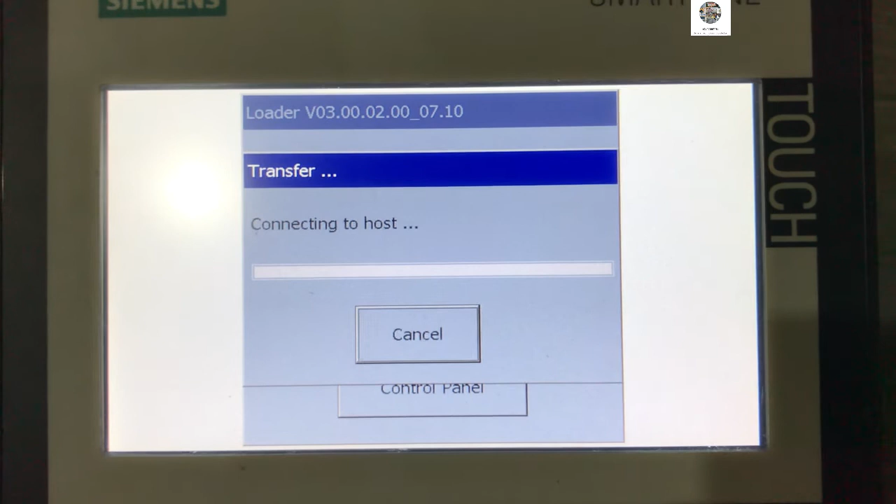So I will put 192.168.2.3, for example. Yes, and the subnet mask is 255.255.255.0, and then click OK. Yes, and then click transfer. Yes, and then let's go to our PC to transfer the data to this HMI, because we already created it, right?

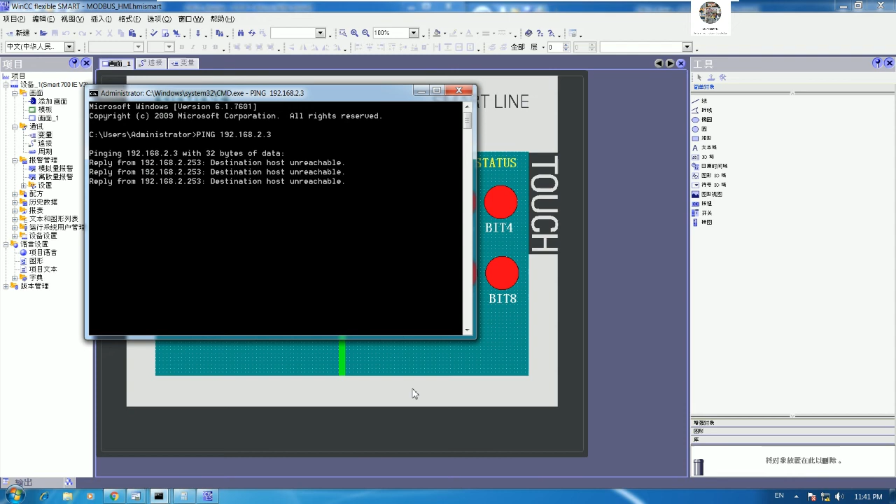So first, let's use the command prompt to ping the IP address that we already set on the HMI, right? And we already connected the LAN cable from my PC to the switch and from the switch to the HMI. So we can test with CMD and then ping 192.168.2.3. It shows like this. It means that our PC cannot communicate with the HMI, right? So let me check the LAN cable again. And then we can ping again. Yes. Okay.

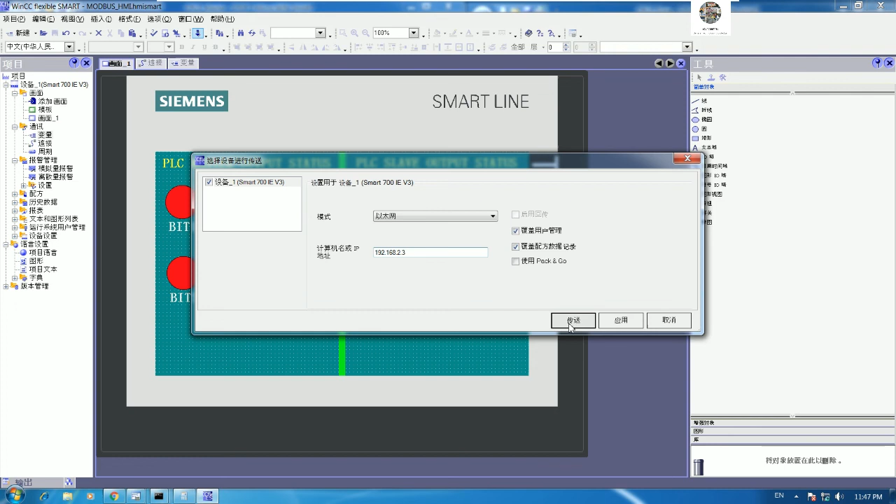So right now we can connect from our PC to the PLC and HMI, right? So we can download by pressing this button and then fill in the IP address here. Yes. So the IP address of my HMI is 192.168.2.3, right? And then please download. Yes. Yes to confirm the download.

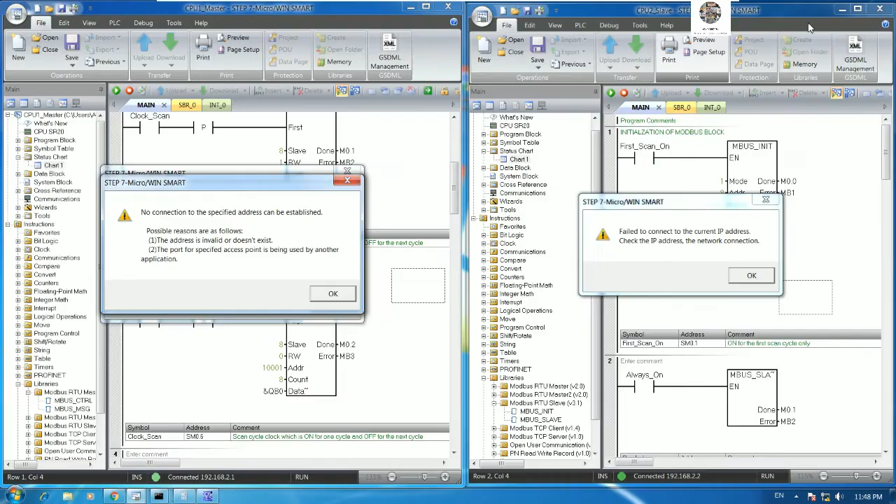Right now it finished downloading, right? So we can go online. Okay. And then we can test it by pushing the button. So if I push the button here, yes, let's see, the HMI of the PLC slave shows bit number 2, and the PLC shows bit number 2 also. If I release the button, it will not show, yeah.

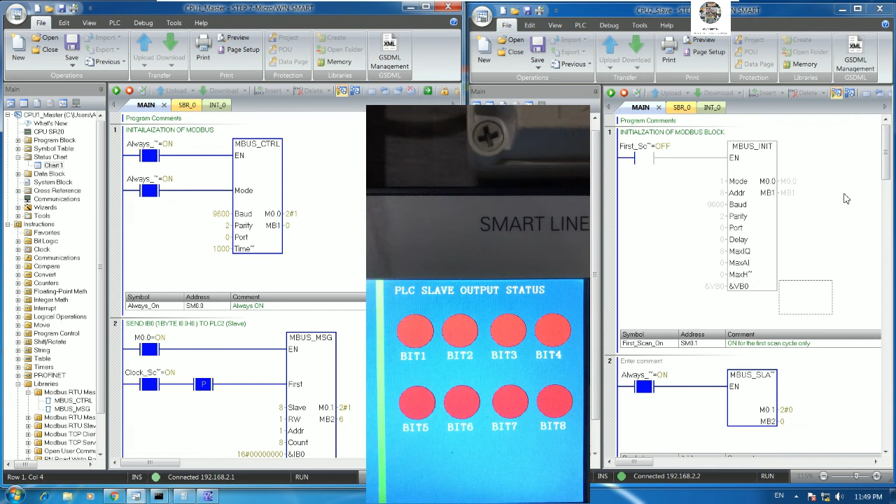So if I push button number 1, the input of the PLC master is turned on, and then the output of the PLC slave is turned on, and the HMI shows green also, yes. So if I test the input of the PLC slave, if I turn on the input, let's see, the output of the PLC master is turned on, and here the lamp is turned on. Yes, I will enable one more. Yes, turned on also.

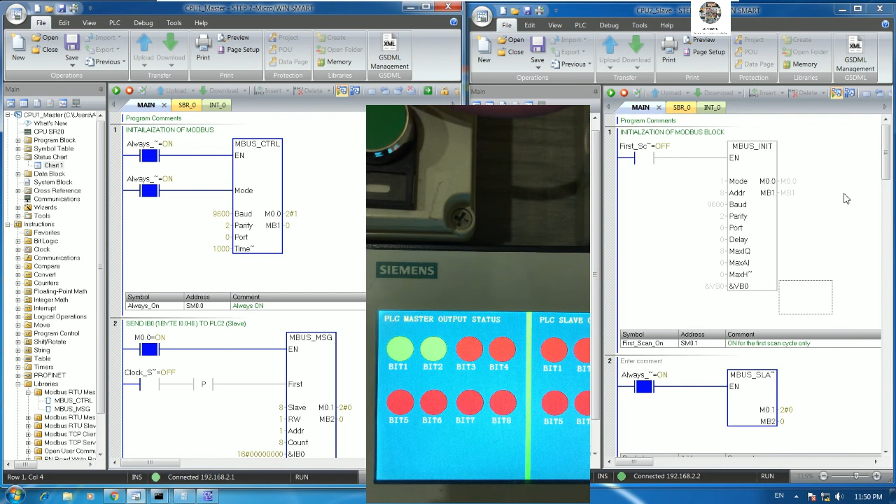So if we force the signal, let me force the signal from the computer, and then let's see the status again. So I will go to Chart 1 and then force this signal to be 255. Yes, turned on. And then for the PLC slave I will force also. I will force 255 and it will turn on all. And let me show the status on the HMI. It will be green, right?

Yes, let's see here, it's all green. And the PLC is green also. Yes, the PLC outputs are all turned on for both the PLC slave and PLC master. Okay. Okay, it turned off.

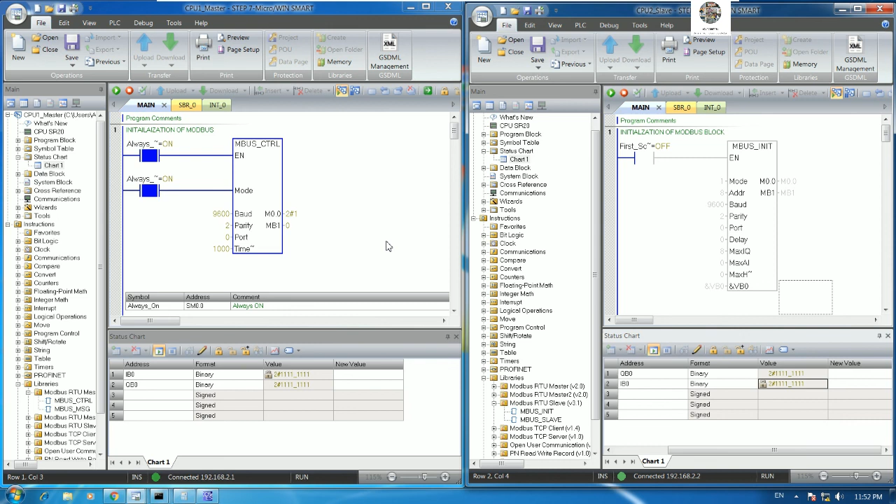So this is part 1 about how to communicate and link data from PLC S7-200 Smart to S7-200 Smart by using Modbus RTU for communication. Okay. And in the next video, I will show part 2 about how to link data from PLC S7-200 Smart to PLC S7-200 Smart also by using the analog signal. Okay. And I will use the HMI also in the next session for part 2, and then link to the PLC by using this HMI. Okay.